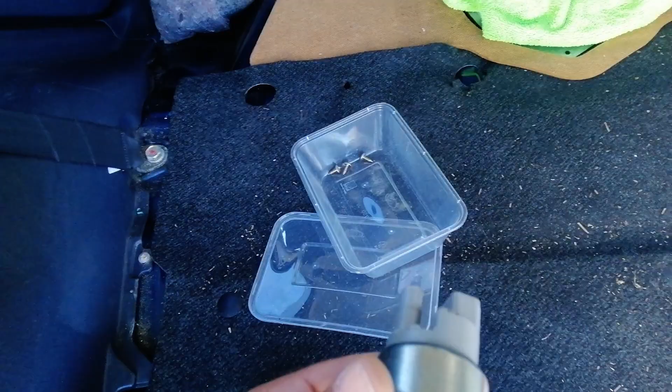Right, today we've got a Mitsubishi Colt dead in the water, and they've had the AA out and told them it was a fuel pump, so he's replaced the fuel pump. I have checked the old fuel pump because it came with a nice extra lead to plug in to test, and the old pump still goes.

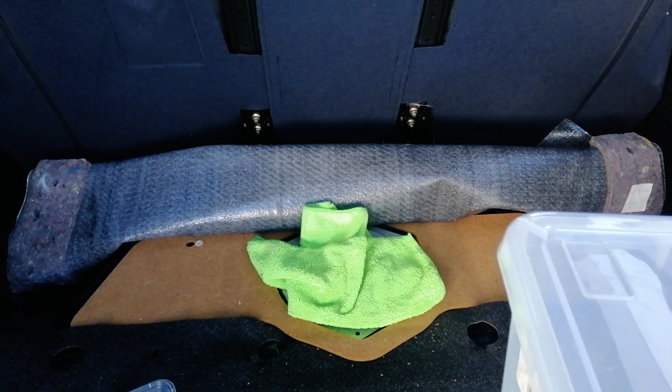So we'll give it a scan and see where it is from there. So we'll do a scan. Mitsubishi.

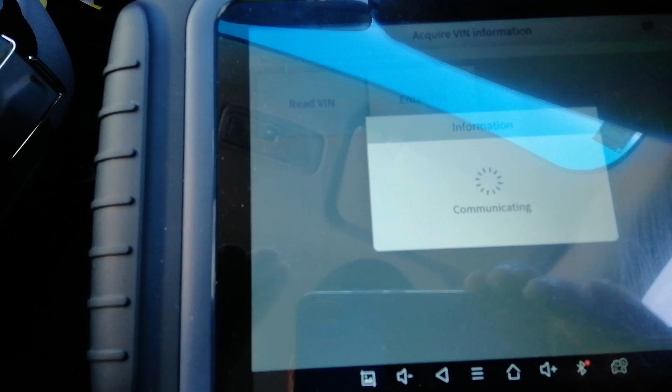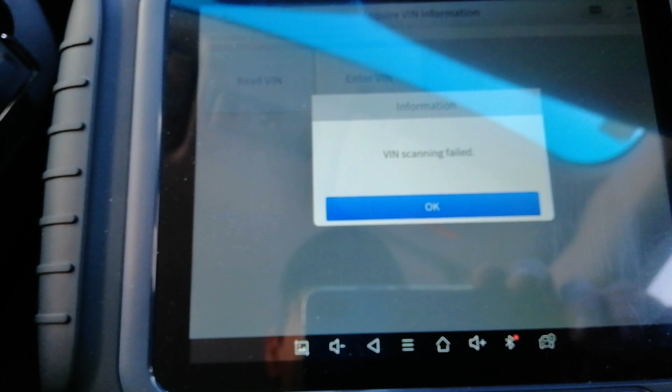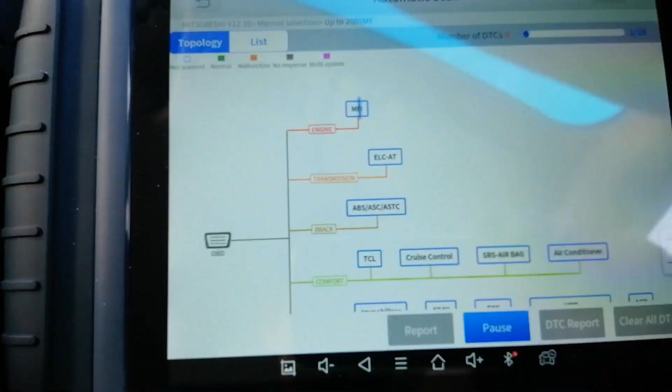Okay, as you can see, ignition is on.

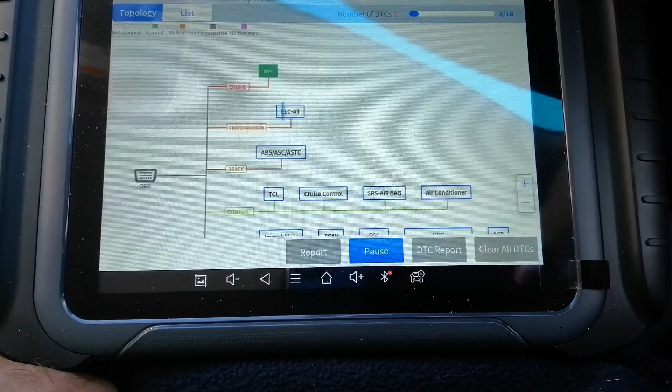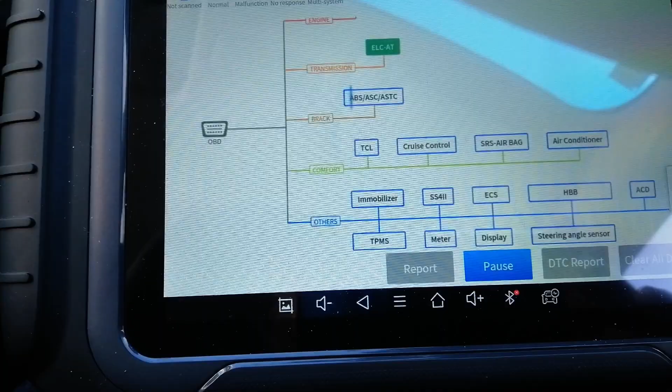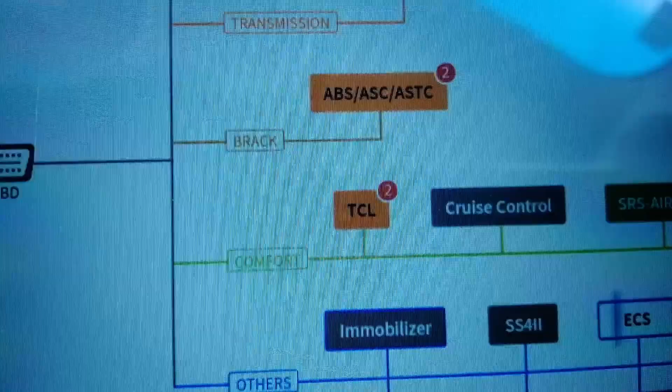Alright, I'll be back once the scan's done. Taking me a while to scan. We've got 2 codes in the ABS, which I'm not interested in, 2 in the TCL, I'll have a look at that. But the one I'm interested in is the immobiliser, which will cut the fuel off. So we'll have a look at that in a second, once this finishes its scan.

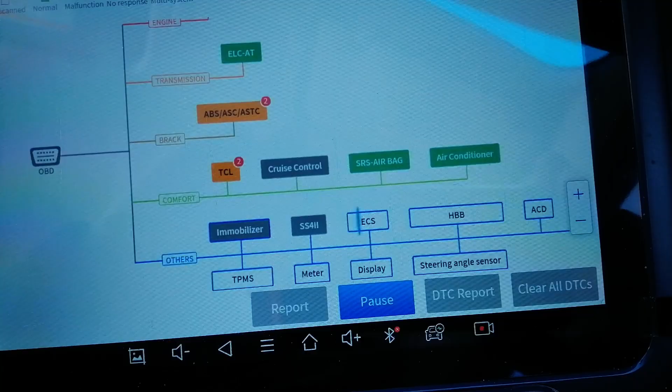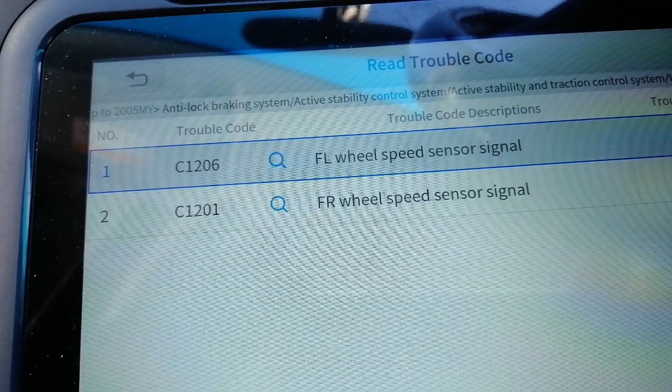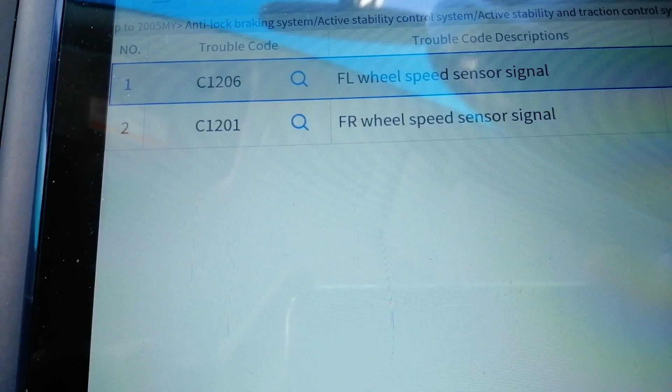Right, read trouble code. Front left wheel speed sensor and front right wheel speed sensor signal. It's interesting, both the front ones. I can understand one going out, but both front ones? We might have an ECU problem, people.

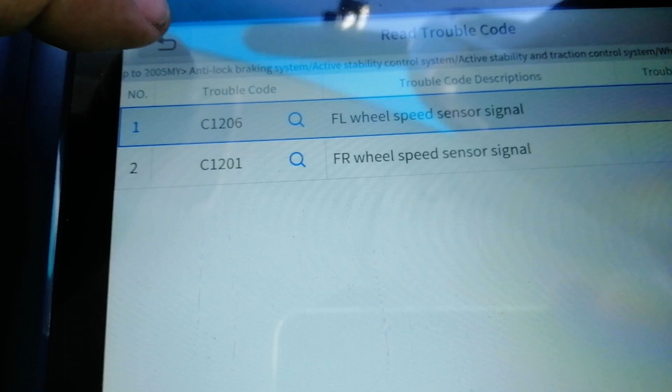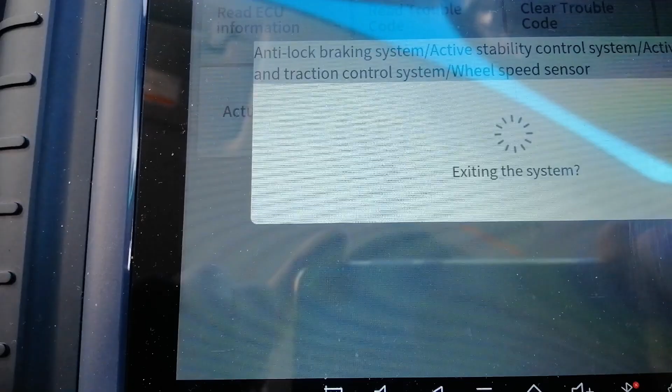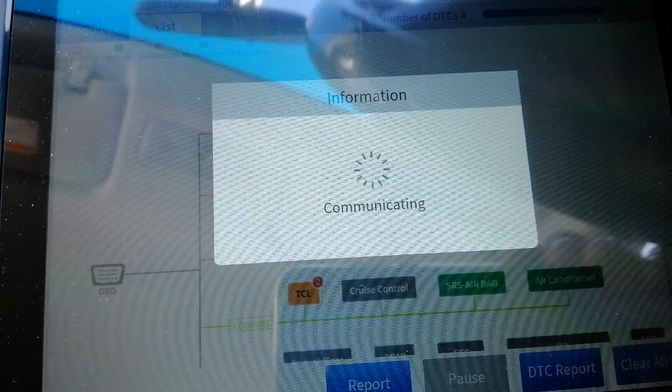I'll bring you back when we get to read the next couple of codes. Alright, we'll get into TCL and see what's in there. Bring you back once we've communicated with that.

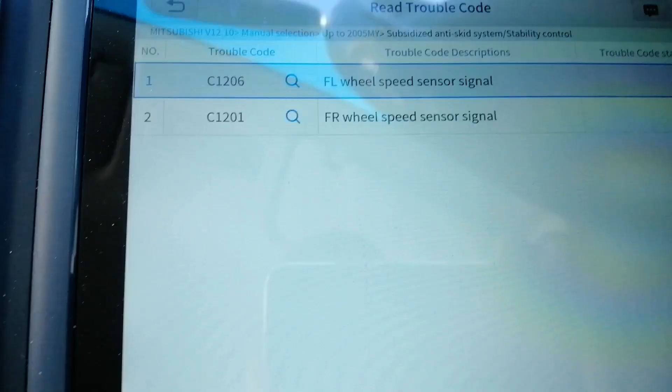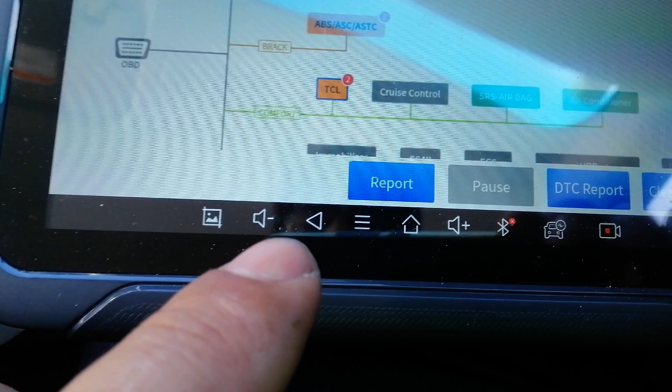Right, read trouble code. Same 2 faults. Okay, we'll go ahead. We'll save that.

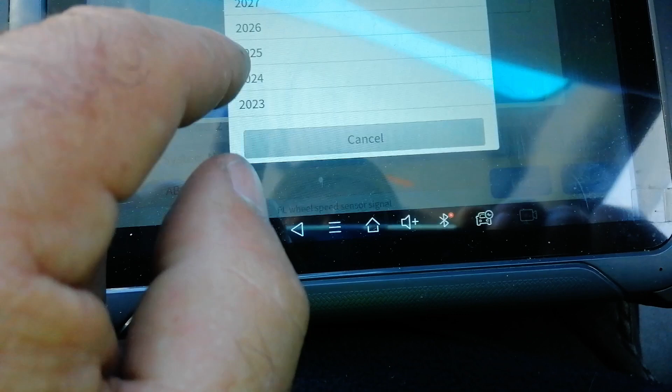And it's a Colt, won't worry about the year and the mileage. Put it in anyway, 2003. And we'll save, exit out of there. We'll clear all DTCs.

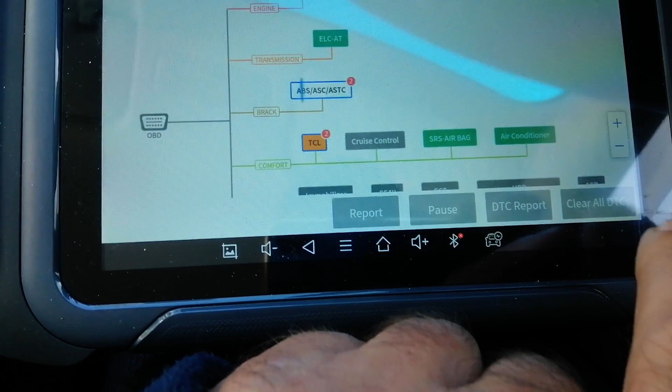Okay, I haven't got another camera with me and I have to use my phone, but I'll quickly scan that key to see if it's got a transponder chip in it, because I'm pretty sure the immobiliser should be green. I'll come back once I know, I'll let you know.

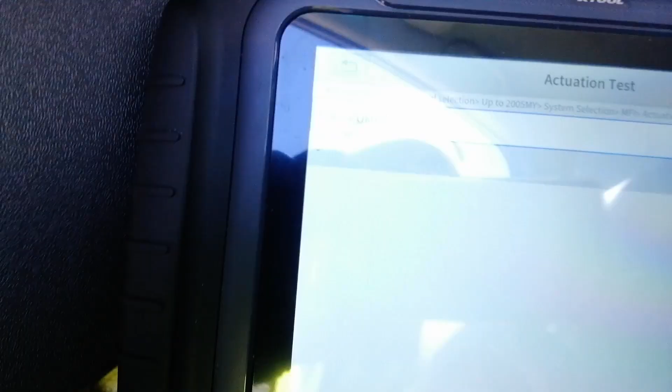Right, and behind the glove box, all the fuses and relays. I've checked all the fuses, they're all good. Quite possibly a relay. So I've got the fuel pump test, I'll figure out which relay it is. Some of these have two, but I'll definitely have a look.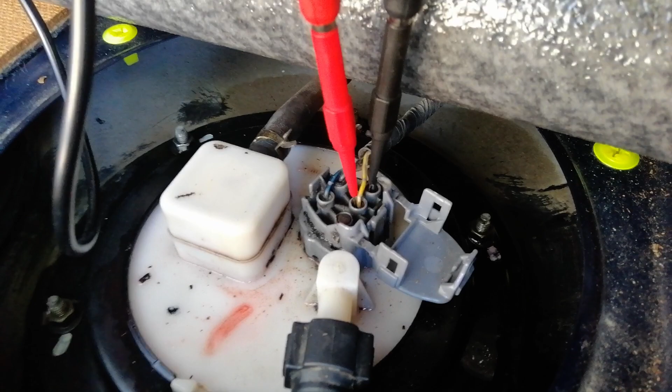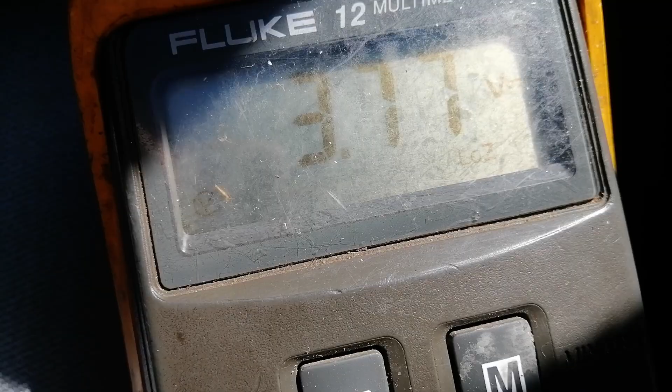Righty-ho, I've just probed the power and earth wire to the actual fuel pump motor itself, and up front, I'm only getting 3.77 volts constant. So we'll see which relay it is, I'll pull them out one by one. I'll come back as soon as I know.

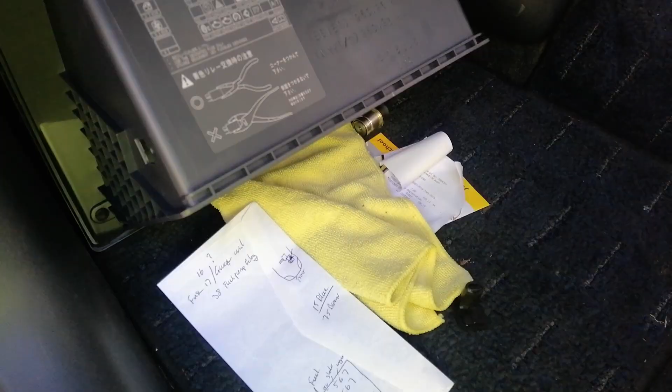Righty-ho, I've checked all the fuses, all the relays, cleaned up all the battery terminals, gone another test - no, I think it could be an ECU problem. In the meantime, the battery's gone flat, so I have to go and charge it up, and I'll be back for part 2 when I've charged up the battery and put it back in, and we'll continue our diagnostics because I'm on site at the customer's and he's at work, so I've got no way of charging the battery.